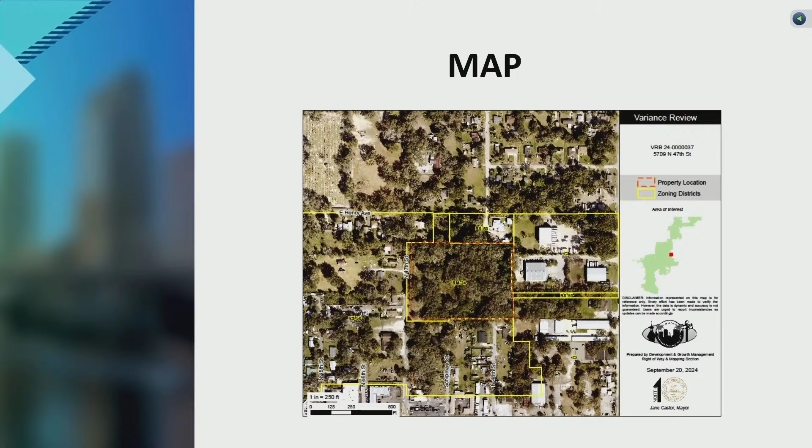So I broke this down into two presentations. We're going to do the grand tree presentation first, followed by the parking reduction presentation. This is a map of the site. These are the trees in question. I'll let you guys take a count real quick. There's 1, 2, 3, 4, 5, 6, 7, 8 total.

Eight, not nine. There's 8. One was lost in the storm. We'll cover that too later on in the presentation.

As you guys can see, these were storm prior photos, so this is not post-storm. This is a survey of the site. As you can see, the little red dots are trees.

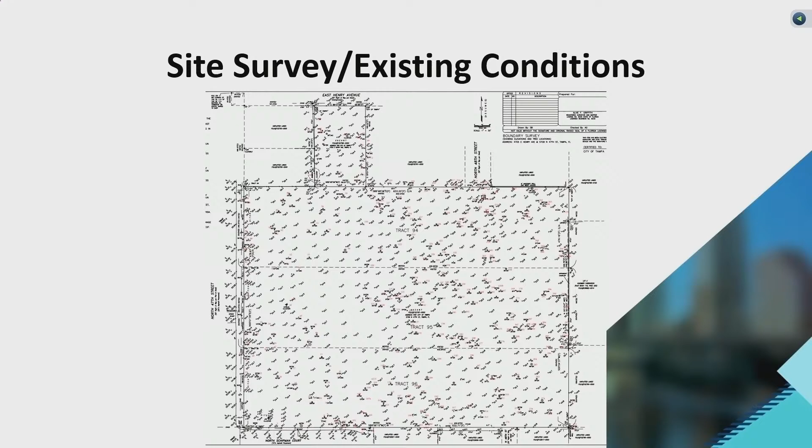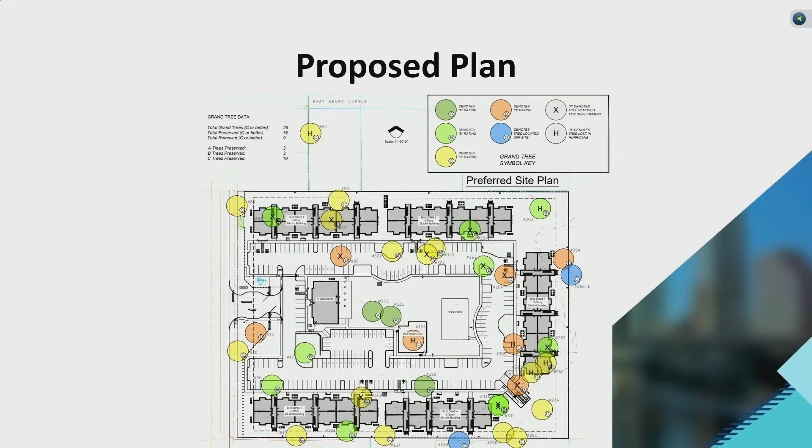Sorry about that. So this is the proposed plan. The proposed plan preserves 3 A trees, 3 B trees, and 10 C trees, all grands. So there's a lot of grand trees on this site.

This is alternative site plan 1, which converts the parking around the perimeter and places the large affordable housing building in the middle. This preserves 2 A trees, 4 B trees, and 8 C trees.

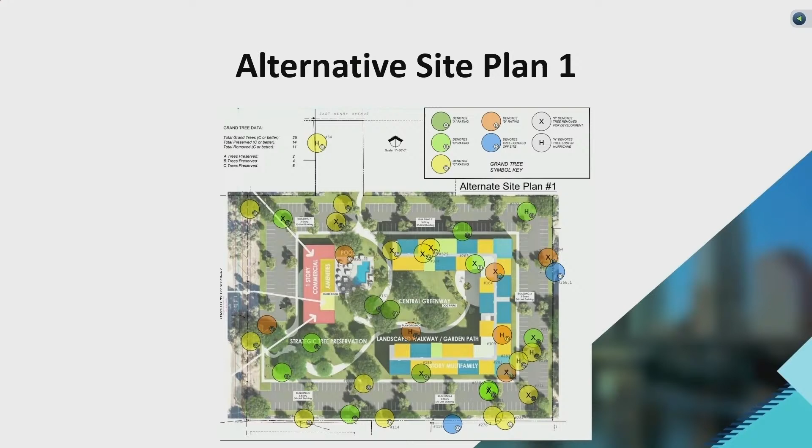And then this is alternative site plan 2, which was, I think, their first proposed project. This only preserves 1 A tree, 3 Bs, and 9 C trees.

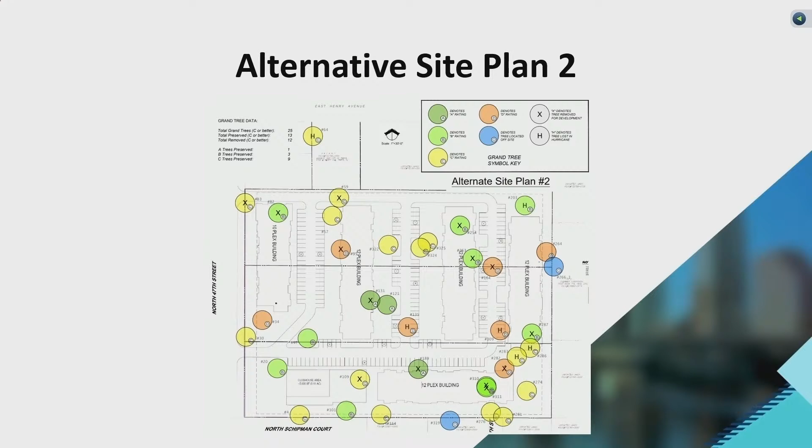So these are the development review comments. Natural resources found it consistent with conditions. The site is removing 16 grand trees total, 9 of which require a variance, which has now been bumped to 8 due to storm damage.

The developer is preserving 16 grand trees. At the time of construction, additional natural resources requests can be made. They are currently working with construction services on some of the parking and other elements to give these trees the best chance to be preserved.

And then transportation found it consistent, wastewater found it consistent, water found it consistent, right-of-way, stormwater, and TECO all found it consistent.

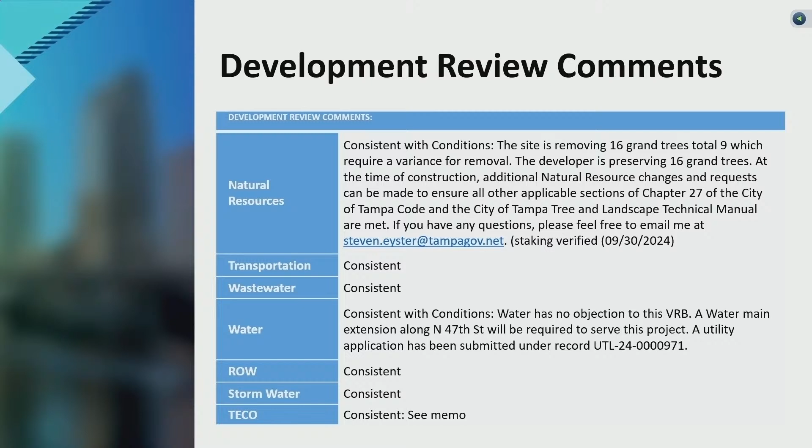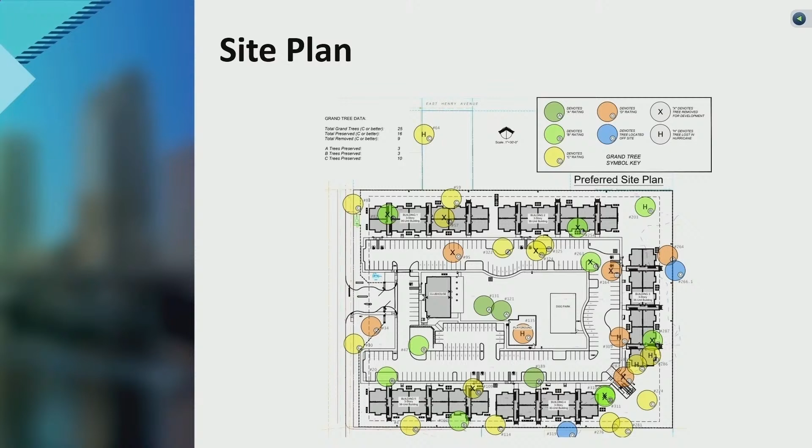This is tied to the preservation of the grand trees and the larger islands and the reconfiguration of the site. So they are reducing the parking down to what Live Local calls out for affordable housing, which is 0.8 per parking space per unit.

Again, natural resources found it consistent with conditions. Transportation added additional verbiage for this consistent finding. The applicant has provided an adequate justification letter for the requested parking reduction from 261 to 176. The proposed development includes 174 multifamily units designated as affordable housing at 80% AMI.

Additionally, the preservation of grand trees on site supports the parking alignment with the Tampa Comprehensive Plan. Wastewater found it consistent, water found it consistent with conditions, right-of-way consistent, stormwater consistent, and TECO also found it consistent.

I know the reduction on the request says 261 to 220. The transportation comment did not account for the guest parking spaces. So that's where that difference is, from 261 to 220. Just to clarify that.

And then here's the section for 2780. And then I'll be available for any comments or concerns.

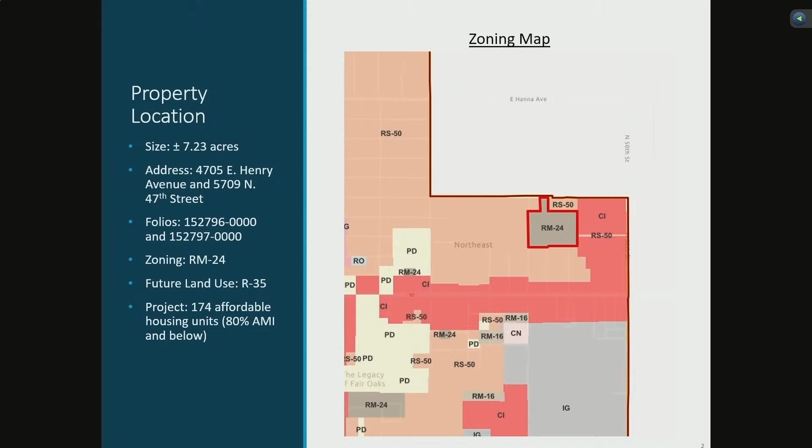We're here today with a variance request to reduce the number of grand trees. Staff indicated that it was 8. Our request was for 9.

I think there may be some confusion on one of the trees based on the type of tree it is. We are looking to reduce the number of trees and then also reduce the number of parking spaces. Again, as staff mentioned, we are reducing 85 spaces off of the spaces required for tenants. We are not seeking a reduction from the visitor parking that's required in code.

Looking at our site plan, this shows our preferred site plan that we would like to move forward with. The site has 25 grand trees rated C or better. This plan would allow us to preserve 16 of those trees, and 9 would be removed. There are 3 A-rated trees, 3 B trees, and 10 C trees that would be preserved with this plan.

This shows the trees that are seeking to be removed, in addition to the trees that were removed by the hurricanes. The applicant, after the hurricanes, did thoughtfully try to redesign the site based on the trees that were still available, so that we could preserve as many trees as possible.

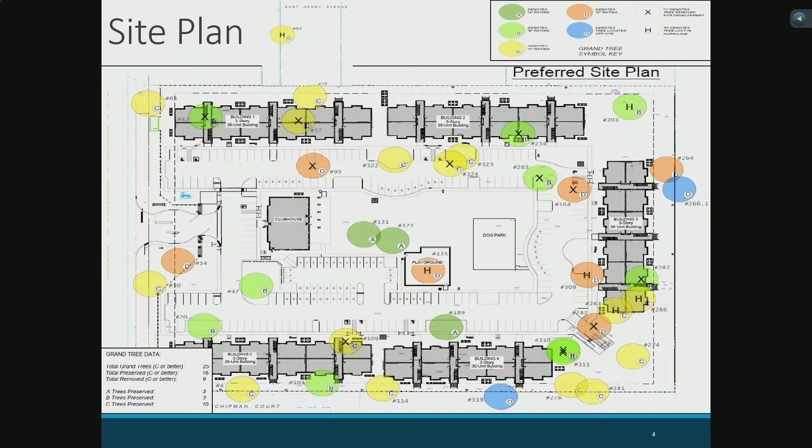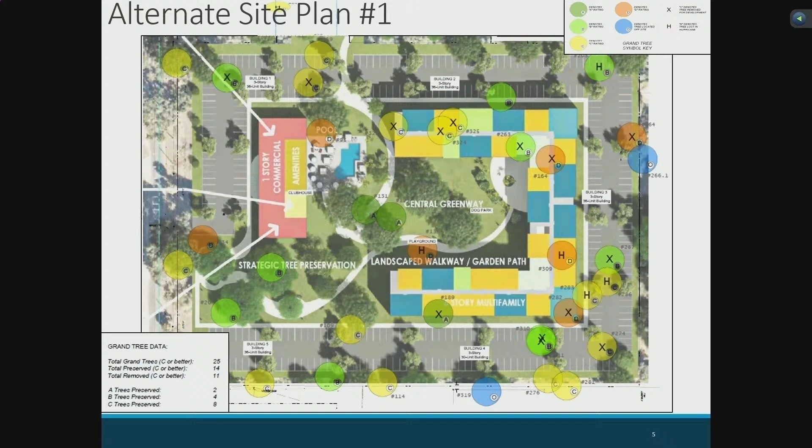This is an alternative plan that we looked at to try to address and save as many trees as possible. With this plan, we would have only been able to preserve 14 trees instead of the 16 we are preserving. In addition, the trees were not rated as well as our other plan.

Same with this one. With this plan, we again tried to redesign the site to meet the RM24 requirements. This plan would have only preserved 13 trees instead of the 16 we are proposing with our first plan.

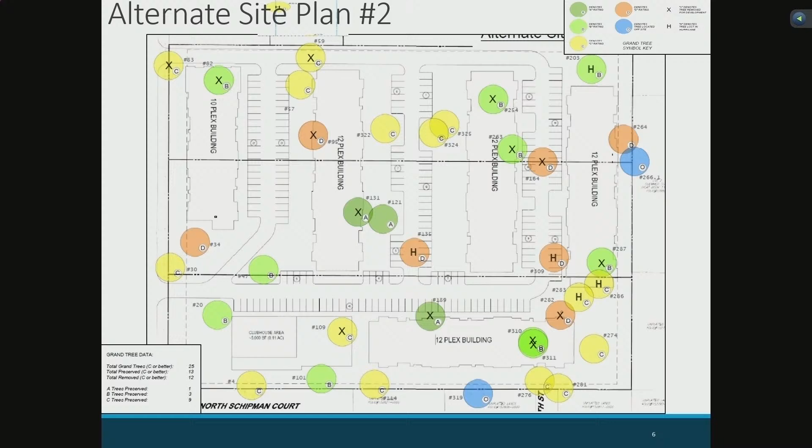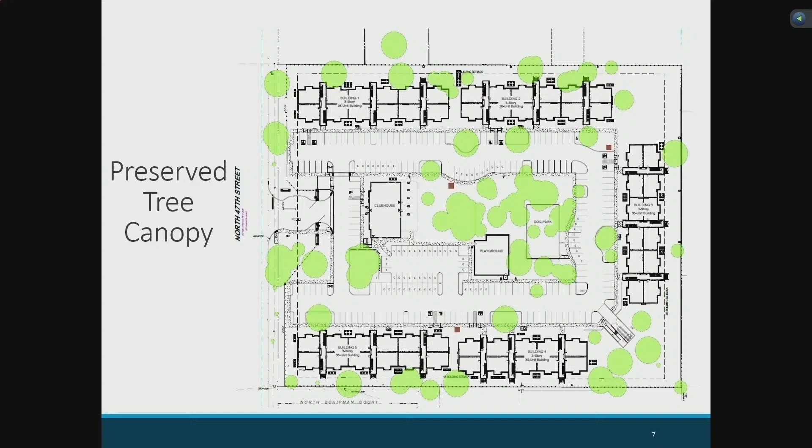As you can see from some of the photos of the site, there is a heavy tree canopy on this property. There are over 300 trees, though only about 180 are rated for the city's purposes. They have designed this site to preserve the tree canopy in the large open space area in the center of the site, over the playground and dog park, to still give it the feel that there are a lot of trees on this property and maintain that integrity.

Walking through the city's criteria for trees and the variance request, the practical difficulty on this site is truly just based on the number of trees. There's 341 total, 183 that are counted towards mitigation, and this created significant design constraints when trying to develop the property based on the underlying RM24 zoning district.

The applicant went through multiple iterations of site plans over a number of months to try and preserve as many grand trees as possible. This hardship is not due to the actions of the applicant. The site has never been developed, and because of the significant number of trees and the canopy, developing the site in any capacity based on the underlying zoning required removal of some of these trees.

This variance is not going to substantially interfere with the health, safety, or welfare of others. It's important after these hurricanes to remove the poorly rated trees, which can become very dangerous in the event of natural disasters. In addition, this variance is in harmony with the general intent of the code and comprehensive plan.

The project is allowed to be developed for multifamily based on the underlying zoning requirements. We've gone through multiple designs to preserve as many trees as possible, especially in light of the hurricanes. And lastly, the variance does allow substantial justice to be done.

This will allow for the development of affordable housing in the city of Tampa, and the applicant is retaining about 65% of the trees on the property, in addition to maintaining that large tree canopy in the center of the site.

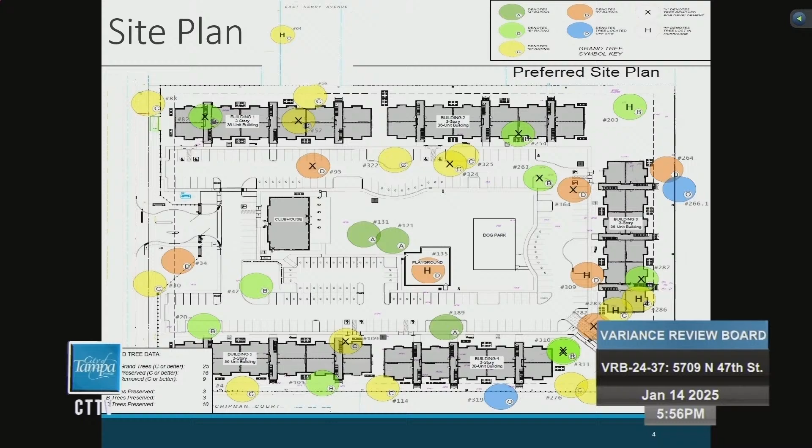Okay, nothing else, we can close the public hearing and hear from the board.

I think this is an excellent use of a piece of property, and the fact that you guys are taking this much effort to preserve what you have, I think is honorable. And I like the fact that the parking is within the middle as opposed to the perimeter. I think it gives the whole site a much better feel for the neighborhood than if you had parking around the outside. I'm not allowed to make a motion, but you guys certainly can.

Let's see, I've got tree down here somewhere. We'll be doing two separate motions. First one we'll do for the tree, the second one we'll do for the parking.

I move that the variance request for case VRB 24-37, for property located at 5709 North 47th Street, be granted as depicted on the site plan presented at the public hearing for removal of a grand tree, based upon the petitioner meeting the burden of proof with regard to the 6 factors determining tree removal as set forth in 27-284.2.5 T4 of the City Code for granting tree removal. Specifically, that the evidence provided in the record showed that they put together 2 additional site plans that did not save as many grand trees as they are able to save here, and we greatly appreciate that.

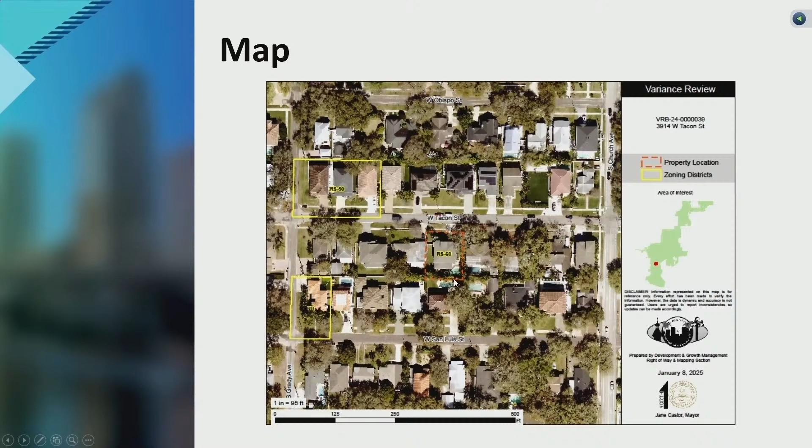All right, good evening everybody. The next case before you is VRB 2439. The property owner is Christopher R. and Jacqueline Ellett. The property address is 3914 West Tacon Street. The zoning district is residential, single-family 60. And the request is to reduce the screen enclosure setback requirement from 5 feet to 3 feet. The reference code section is 27290. This is a map right here, and as you can see, the property is outlined in the red dashed lines. This is a site plan right here, and this is the reference request.

The development review comments are as follows. Natural Resources finds it to be consistent with conditions. Transportation finds it to be consistent, as well as wastewater. Water has no comment as of December 31st, 2024. Right-of-way finds it consistent. Stormwater finds it consistent. And TICO finds it consistent with conditions. These are the standards for the Variance Review Board, and I'm available for any comments or questions from staff.

Okay, is the petitioner here?

Good evening. My name is Jacqueline Ellett. My address is 3914 West Tacon Street, Tampa, Florida, 33629, and I have been sworn in.

I had wanted to use the projector here because I did want to reference some photos during my presentation. Do I just set things on this?

So my husband and I bought this property in 2016, and the prior owners and the developer built this house along with the pool in 2013.

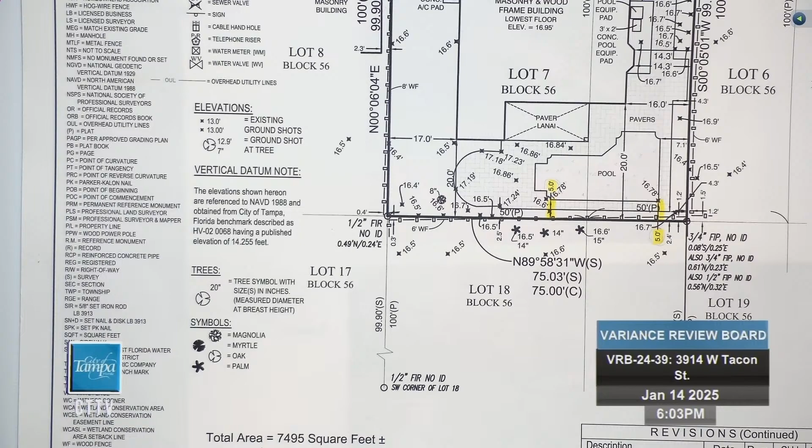Our hardship takes the form of this pool, because what we would like to do is install a screen enclosure around it. During our research we learned this is a copy of the survey we had done. You can see the exact water line of the pool is exactly 5 feet from this dark black line, which is the property line, and the screen enclosure setback requirement is 5 feet. So essentially our screen would be right inside of the pool if we wanted to have it installed.

Upon learning this, and before even beginning this project, I reached out to my neighbors who share that rear property line with me, Ben and Susan Stevens, and they've agreed that this isn't a big deal to them and that the variance requested will not substantially interfere with or injure the health, safety, or welfare of them or their property. So there's no problem there.

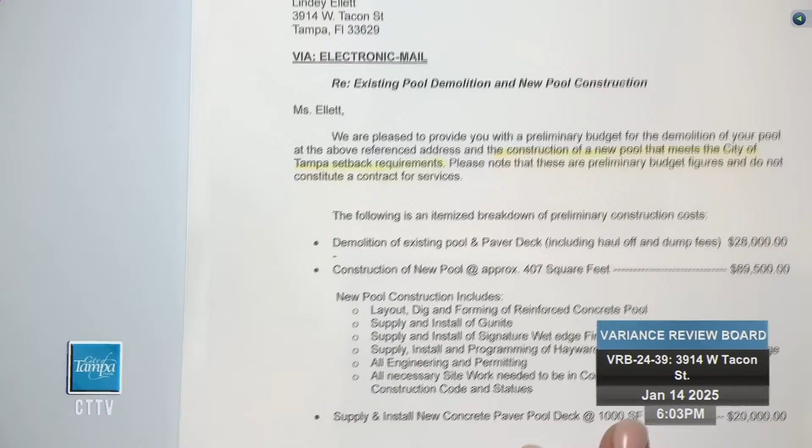From that point, I went on to worst case scenario, and I asked, well, what happens if this hearing doesn't go the way I would like it to go, and we have to actually move our pool? So this is the quote I received from Landscape Fusion, a local company, to demo the pool, move it in 12 inches so that we can go ahead and put the screen enclosure in. And it was $137,500, which is something we can't afford.

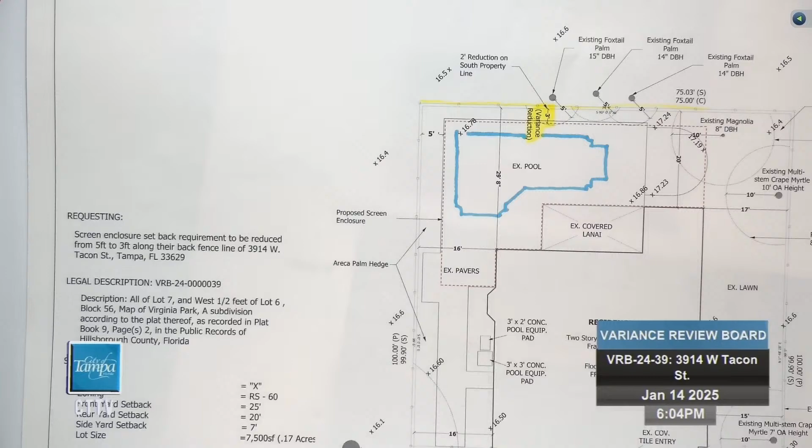So to add more clarity to our request, I've went ahead — this is the site plan for the proposed final structure. Can you zoom out a little bit? Zoom on out, Elmo? There we go. Yeah, so this is the backyard fence.

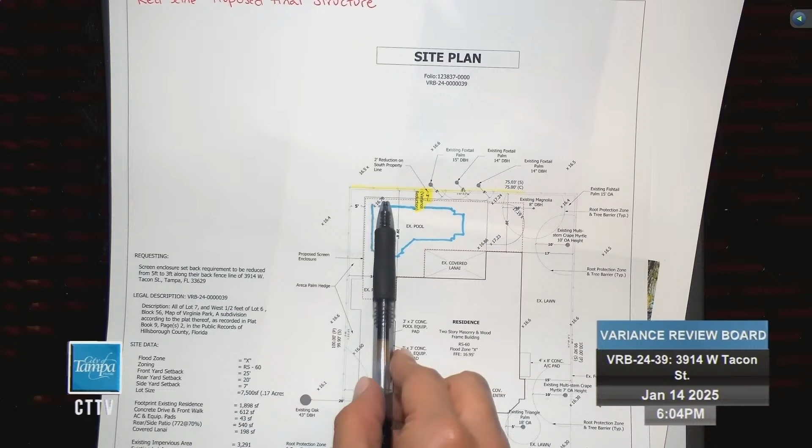This yellow line is the property line. This red dashed line is the proposed screen enclosure. And this blue line is the water line for the pool. As you can see, there is still room to enter behind the screen and to repair or maintain the fence and the screen enclosure as needed.

As far as — let me get my outline here. We do believe that there's a hardship in this case because of the existence of the pool prior to us owning it. Our neighbors don't care. It's an expensive problem to fix.

In addition, under the Tampa Comprehensive Plan, this request is in harmony with it, as there are personal property rights that have been recognized, and one of them is under PR Policy 1.1.1. It says that the following rights shall be considered in the local decision-making process, and that would be the right of a property owner to use, maintain, develop, and improve his or her property for personal use or for the use of any other person. So Florida law does require this board to at least consider the fact that we have a right to add a screen enclosure to our backyard.

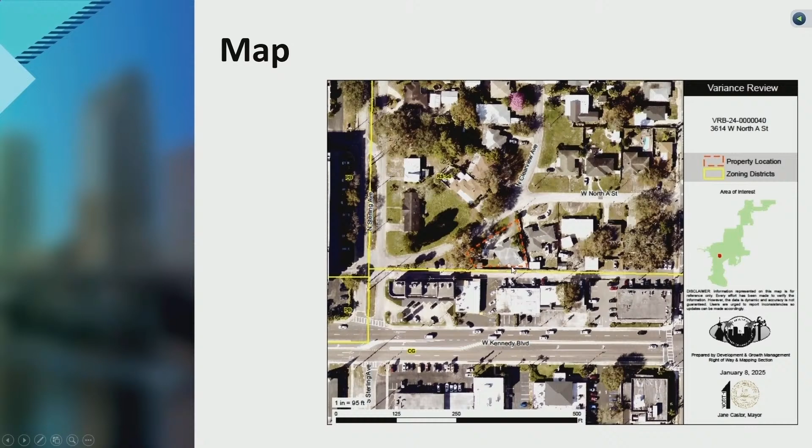That is correct. So any encroachments - this is an odd lot too. When we look here, they're getting a 20-foot setback here, because this is considered their front. So this shifts their rear and other setbacks around. That's why if you look here, everything is kind of adjusted. And that's what happened with this - the placement of the house plus the size of the lot has led to this situation.

Yeah, because the most severe encroachment is from the existing house. Correct, yes. It's 11.4 along the east side and 3.2 on the south side. Correct. Whereas the addition's is 14.6 and 11.6. Correct. Okay, thank you.

Any other questions? Okay, what was it? I'm sorry? Are we asking questions of the petitioner? Sure, still open. Sir, can you approach?

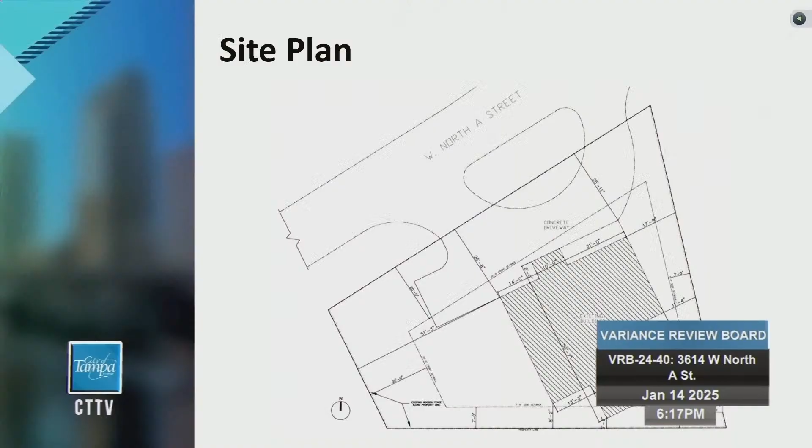So you mentioned that there was a sunroom existing already there? Yeah, I think what he already pointed out, the corner of the house is very close to the fence at the back. Like I said, I don't know where the front of the house is, but the corner at the south fence is very close.

That was an existing sunroom - it has AC and everything inside, so that was already there when we bought the house. That one was already there, yeah.

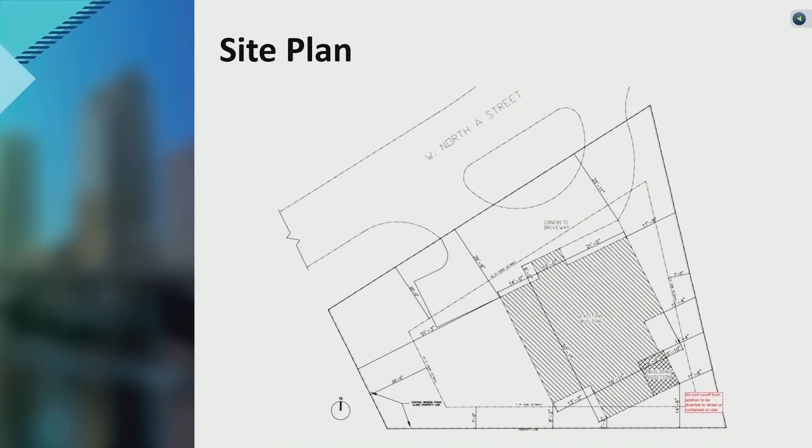Did you put a new roof on? Did you take the sunroom off and put a new roof, or did you just build underneath the sunroom? And for the bathroom? Or yes.

For the bathroom, yeah, the bathroom was a new addition. Where the sunroom used to be? No, the sunroom is still there. We didn't touch the sunroom. We just added the bathroom next to it. It's that one with the little lines there, on the right.

So the sunroom was already there with the AC even included. And so you did the addition, it turned out that you did not have permits to do the addition?

When we started, the people who did the renovation before us, before we bought the house, told us we could do it, or they could help us, because they already had a permit for the area for flipping or remodeling the house. So when the city went, they didn't really have anything. But the city asked for a variance and a permit, and we solicited that, and they approved it. I mean, when we did the whole process.

What we didn't do is finalize everything. We didn't know how that worked, so we didn't finalize the process. But we already had the variance approved, and the permit, for that bathroom.

So it sounds like we had a renovation permit, and the bathroom is complete. Yes, sir. And you're saying you had a variance to put the bathroom in? The variance, I mean, we asked for the variance after we started with the bathroom. You asked for it after, so this is clearly an after-the-fact request, right?

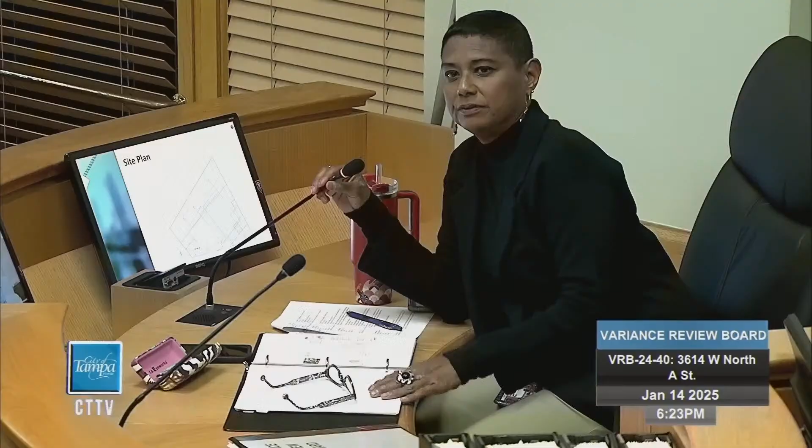There had been a variance and a permit previously. So variances do have a duration, right? So if the permit wasn't closed out and the variance is now expired, permitting can't finalize and close out the permit. It has to start all over again. Correct, so they have to pull a new permit in order to close this addition out, since it wasn't included in the other permit, correct?

We did, so after we were granted the variance, we pulled the permit, did finish the bathroom with a permit. We asked for a permit, received a permit, somebody did the work, but it was never closed. That's what happened, the permit never got closed out. And so when we took it up again, I thought it would be as simple as closing it out at that point, and it wasn't. They're like, oh, the variance only lasts for 2 years, and so that's why we're back here at square one.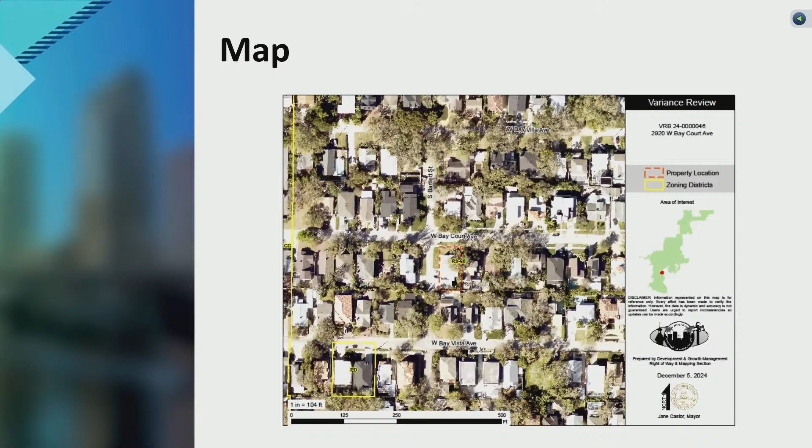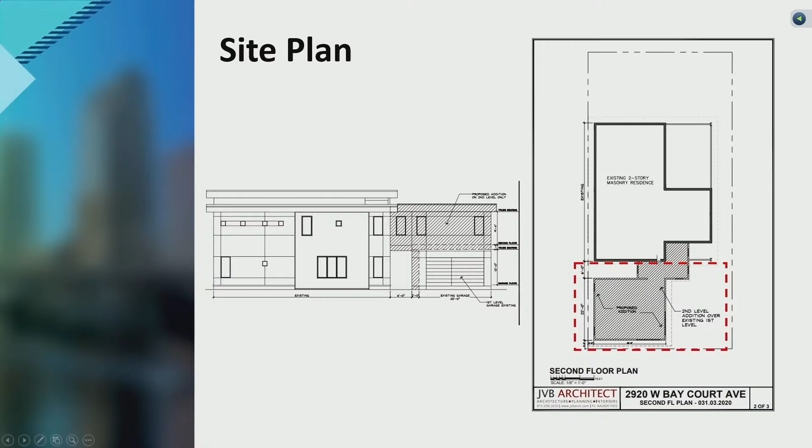That letter has been added in your packet as well. This is a map of the site, and this is the current layout of the house. I included both the site plan and the side profile. The garage is located here and is connected to the main structure, and they'll be adding a second floor to tie it together.

This is a close-up of that section showing the 2 foot setback. These are the comments from the reviewers. Natural Resources found it consistent with conditions, stating that both buildings already exist and the variance would be to add the second floor. Transportation found it consistent with conditions, noting the driveway will have to meet transportation technical standards. Wastewater, water, right-of-way, stormwater, and TECO all found it either consistent or had no comment. This is the standard for the Variance Review Board, section 2780, and I'll be available for any comments or questions.

Good evening, Board. Steve Michelini. I've been sworn, and I'm here representing Dr. Patel, living at 2920 West Bay Court. Mine is 2407 Sunset Drive, Tampa, Florida 33629. Let me walk you through the...

Yes, I was sworn. The site plan first. The site, first of all, is only 50 feet wide and it's zoned RS 60, so we're already starting off at a disadvantage. It's also on a corner, which applies additional setback criteria. Our request does not affect that.

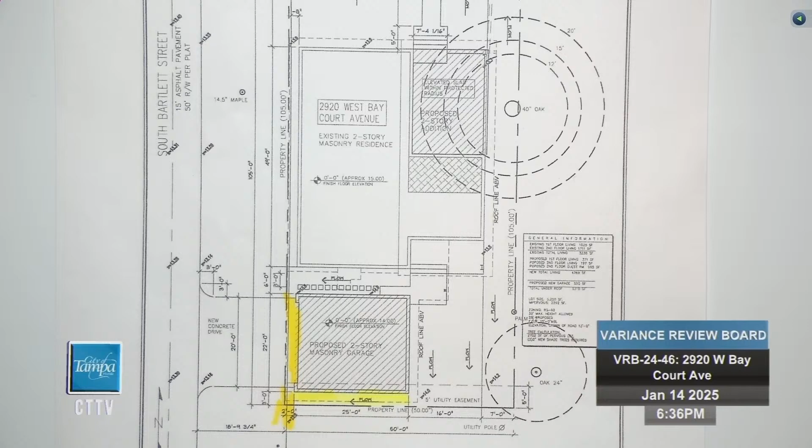We've been working with the tree and landscaping department to make sure there were no conflicts. It also restricts us on the ability to provide any additional square footage for the home because of that, and because of this off-site 24-inch oak, which has an extremely large limb span that goes over into this property.

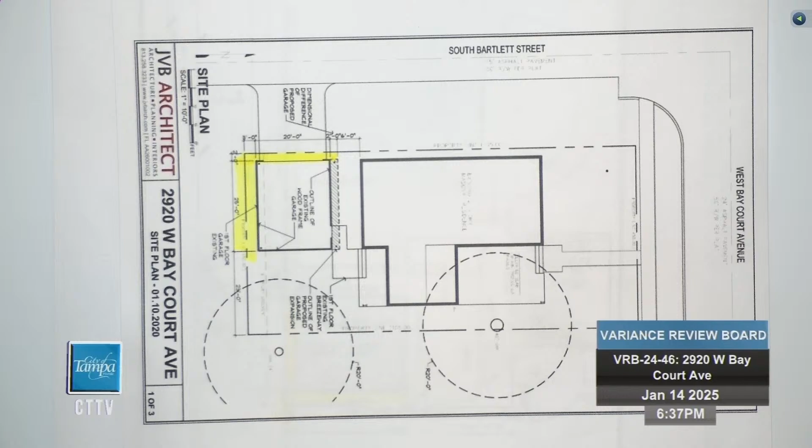This is a little closer detail showing the extent of the impact of those trees on the main structure and also on the existing garage. And there's a close-up showing you basically the 3 feet here of the setback and the 2 feet over here that already exist on the garage apartment.

This is a picture of the existing house. And this is the existing garage.

Dr. Patel has provided a letter which I believe you have a copy of. I'll read it into the record. My name is Bhavin Patel, and I live at 2920 West Bay Court. On November 19th, 2020, our request for variance was approved to add a 2-story detached garage.

The variance was valid for 2 years, and during this time, most of the country was on lockdown from COVID. As a medical doctor at the time, my children were age 2 and 4, both high risk to COVID infections. Because I was deemed an essential worker during COVID, I was exposed to patients at high risk for COVID. As a result, I was living away from my family home during the weeks, and I had to work. I had to put a hold on construction until the pandemic was over, and I did not want my 2 children at high risk to be exposed.

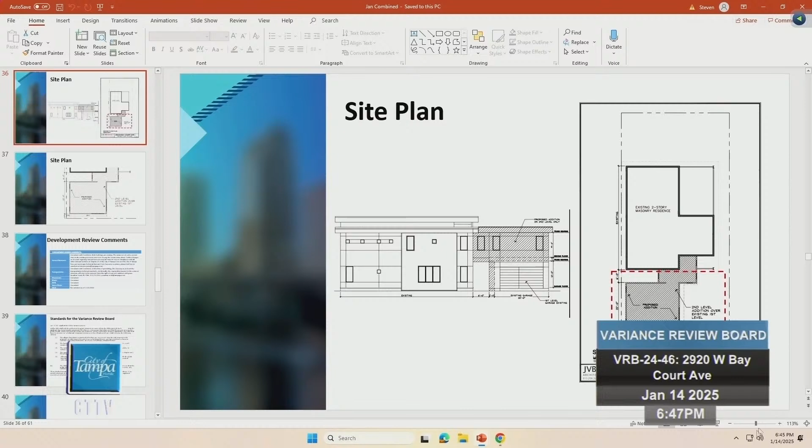Side is 3 and 2. There's the site plan. Okay, so the side does go to 2. Okay, then I guess we could do just this one, and then you'd have to come back for the south side.

Should we perhaps continue this case and ask that they renotice for the additional setbacks? That's up to staff. Is that part of your request, Stephen, in the application, or does the request need to be modified? To address legal's question, it would be both, the request would need to be added, and then noticing would need to be redone. So it'd be both parts.

Okay, would the applicant like to proceed with having this variance for just the west side now and then come back for the south side, or would you like us to continue and come back for both, and modify the request? Staff would recommend doing a continuance, so then we can include both things under one properly noticed variance request. Okay.

Thank you, sorry for the trouble. I will withdraw my motion, and I guess I need to reopen the public hearing. We respectfully request a continuance so we can amend our application. I move to open the public hearing so that we can hear the request from the applicant. Second.

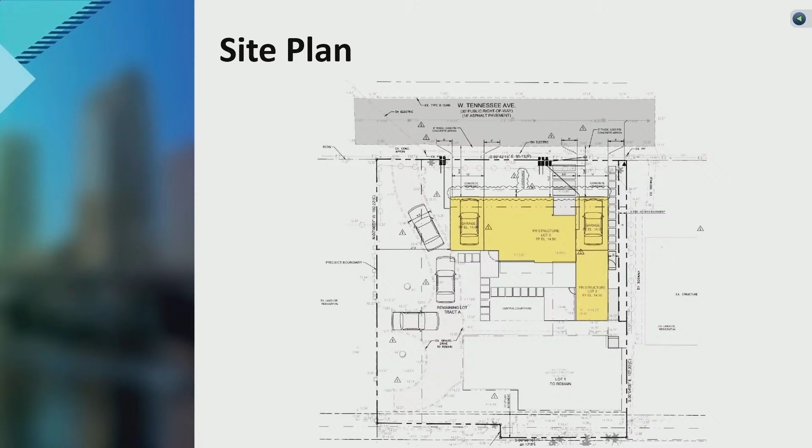Hopefully I tried to clarify. It's kind of a weird nuance in the code. But if you guys have any follow-up questions, I'm available.

Okay, thank you. Natural resources found it consistent with conditions. The setback variance is not within the tree protection zones. Transportation found it consistent, wastewater found it consistent. Right-of-way found it inconsistent because this project is tied to a final plat, which would need to be updated with them to address any HOA property or easement if the variance is granted. Stormwater found it consistent, and TECO had no comment.

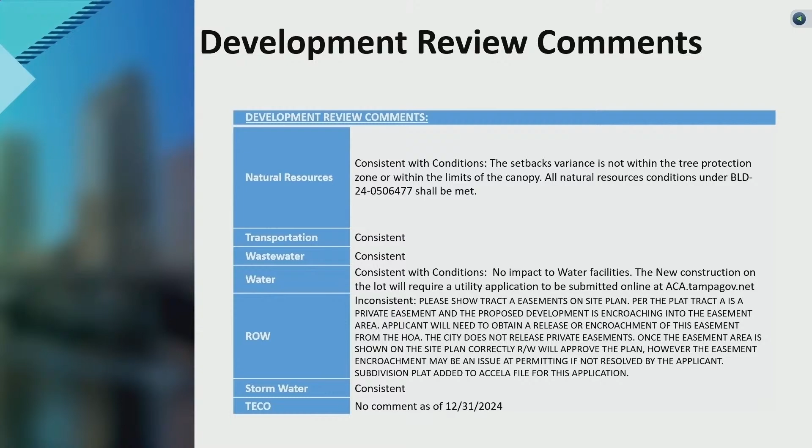Let's see if I have any additional information. And that is it. Let's switch over so we can kind of zoom in, just to clarify this request a little bit more.

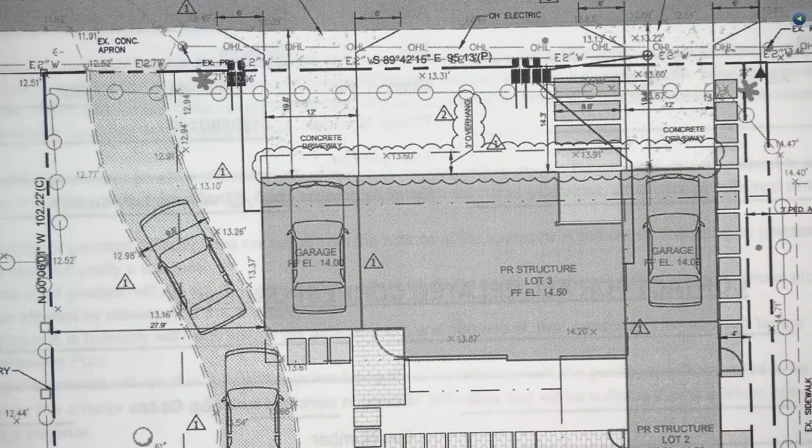So the current property line is right here. This is the setback that was granted to the previous variance. This hash line here is the 3-foot overhang for the architectural feature that reduces the front setback now to the requested setback that's in front of you today. And then this is non-livable space, this area here. It can only be used for architectural features.

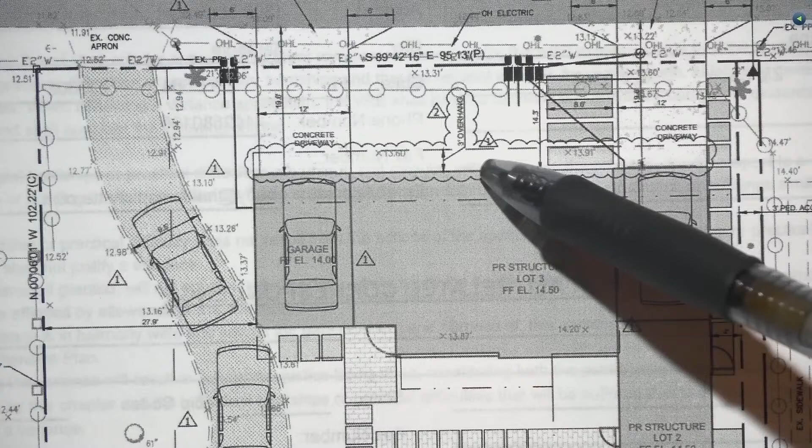Would that be like an eave? Yeah, like an eave. This has almost a large vertical wood display feature with a glass front. I believe the applicant has renderings of that as well to show.

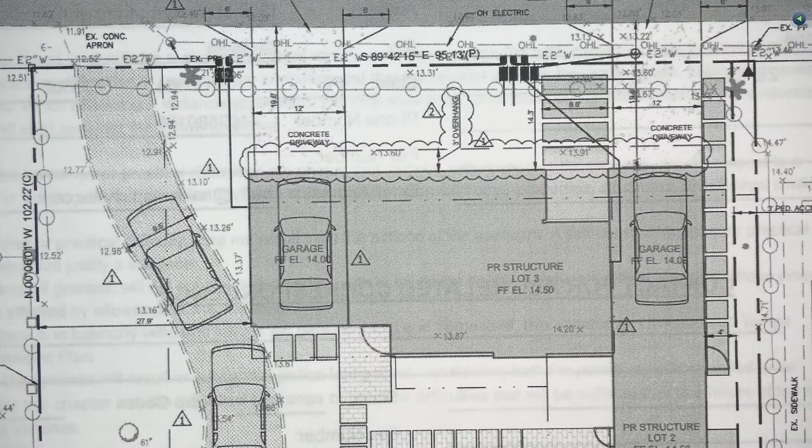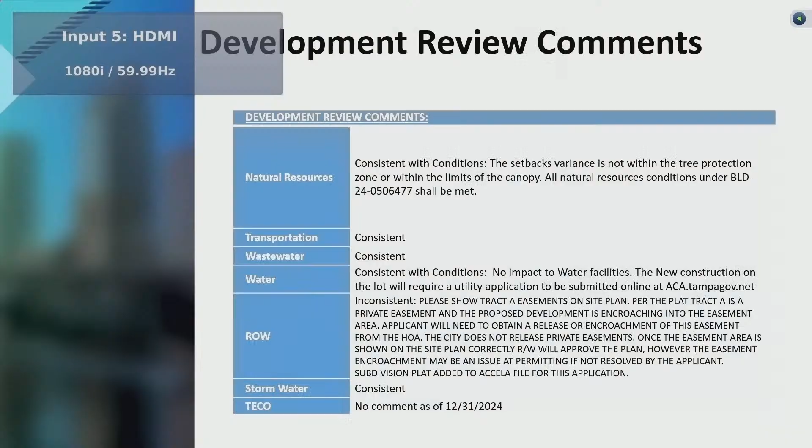Okay, is the applicant ready? Good evening, my name is Hazem Habib. Address is 8341 Torrington Avenue. I'll be representing the owners, Andrei Girenkov and Inara Alimova, and I've been sworn in. I do have a flash drive I would like to use.

Should be the one that says final. Yeah, yeah, this one.

The project location is 2510 West Tennessee Avenue, and the owners are Girenkov and Alimova.

Do you have the agent authorization form to present? I do not have that, no. The applicant, Buffy, could not make it; she had a medical emergency with her husband, so I'll be representing her as well. Do you work for the company? Correct, yes. I was involved in the design for this project.

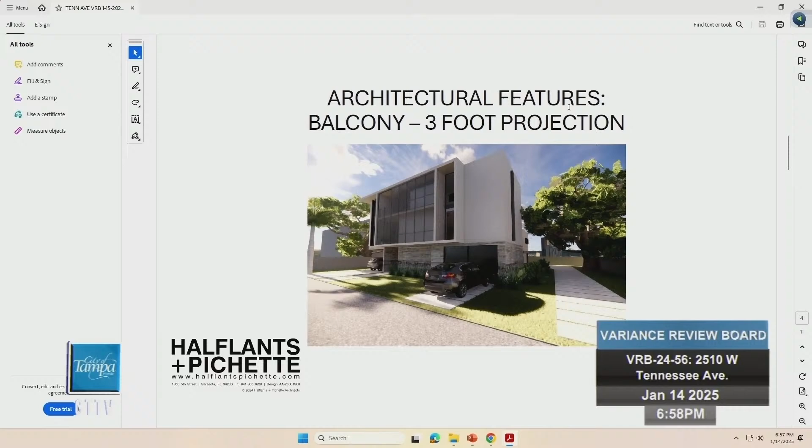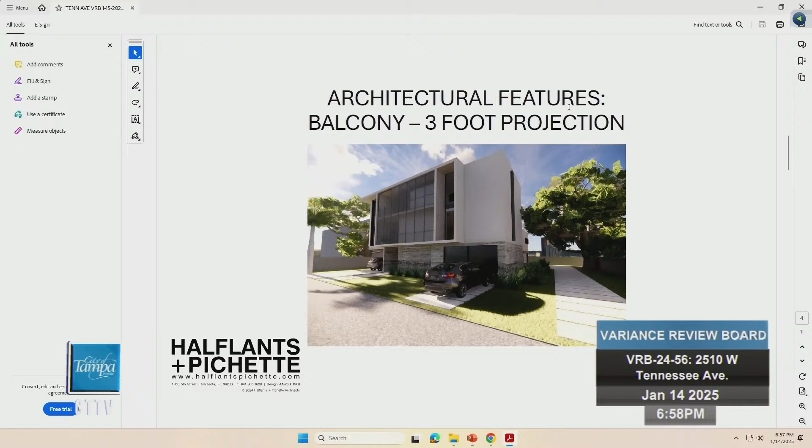So this rendering shows this 3-foot projection. It only consists of the balconies on level 2 and level 3, and it's non-habitable and not walkable. It's only a major design feature of the character of the house.

This large shadow box design enhances the aesthetic appeal, making the home unique and cohesive in its style. It adds depth and interest to the facade, moving away from a flat, uninspired look that might detract from the neighborhood's visual quality.

This 3-foot projection does not negatively impact the neighbor's sightlines or privacy, since it's only accessible from these balconies facing the street, facing Tennessee Avenue. The overhang is entirely within our property line and does not interfere with public rights of way or utilities.

Approving that variance allows for high quality architecture in the area, increases the aesthetic standard, and potentially raises property values for the neighborhood if the design aligns. As I mentioned before, this really depends on this overhang and its projection. If you have any more questions, please let me know.

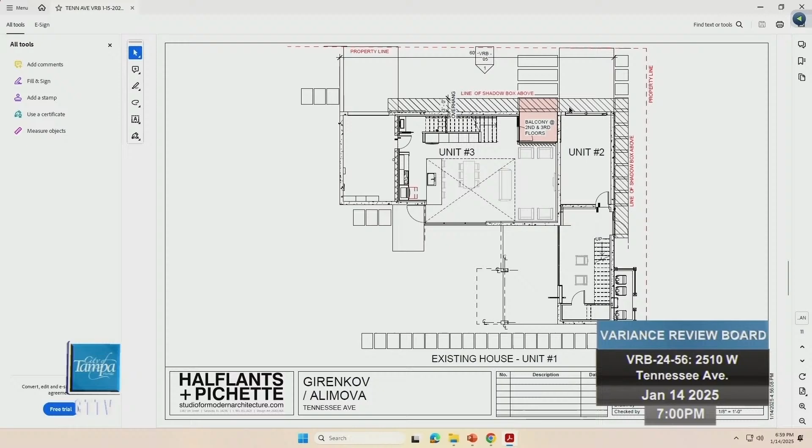We're not encroaching on the setback on the first level. It's just on the second and third level, and it's a major architectural feature that represents the uniqueness of our house and the overall design and aesthetic of it.

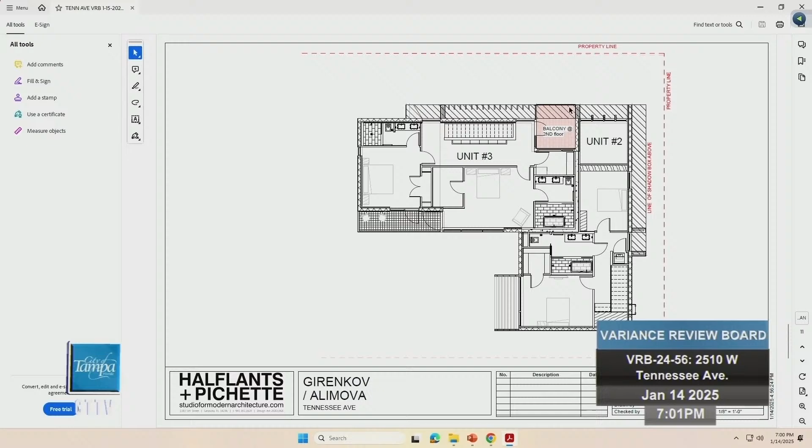You can also see here the balcony on the second floor highlighted in red. You can see that the rest of this projection is not habitable, and it doesn't encroach on anyone's privacy. This is also the second floor and the third floor as well.

This elevation from Tennessee Avenue is the front main elevation, and you can also see where this projection is mainly used, and the rest of this feature is such an integral part of the overall design. This concludes my presentation.

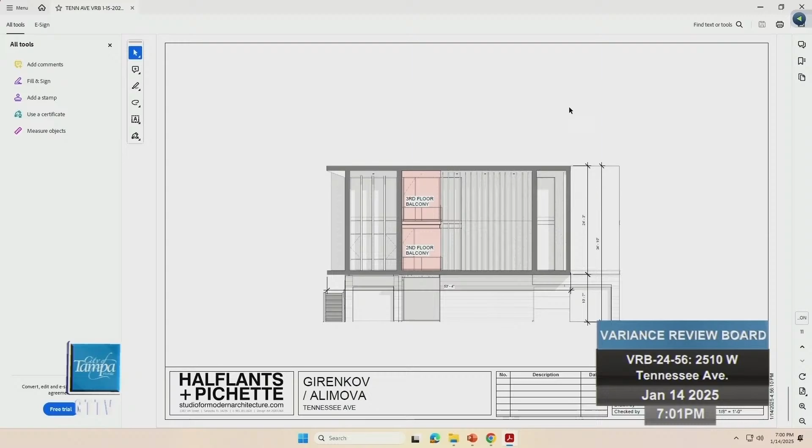Is there anyone here to speak for or against? Rebuttal? Do we have questions from the board? Yeah, I've got some questions.

Looking at the site plans, it looks like the architectural feature runs parallel with Tennessee Avenue, but also encompasses the east side of the building along the side lot line. The request is to reduce the setback from 14.3 to 11.3. Are you only needing the reduction in setback on the front of the building, or also a reduction in setback on the side of the building?

So it's only the front, but we don't want to reduce the setback. We just want to have that 3-foot overhang that is naturally allowed in the code applied to this.

So we don't want an overall setback to 11.4. We just want to keep the setback as is, but have that 3-foot overhang that is usually allowed. Okay, and for staff, for the wording of that, are we still going to call it a reduction in setback, or are we going to call it an allowance of the 3-foot architectural feature? It would still be a reduction in setback, but you could clarify as a conditional approval that the additional 3 feet can only be used for architectural features.

Is this a request to reduce just the front or the side as well? Just the front. So the side portion is already fine, it meets code. Yeah, the side is fine. So the side architectural feature is fine, the front is what needs the reduction. Correct. And there was no prior reduction to the side? That is correct. And there's nothing on the ground floor, it's just an overhang over that space. Correct, just the second and third floor, yes.

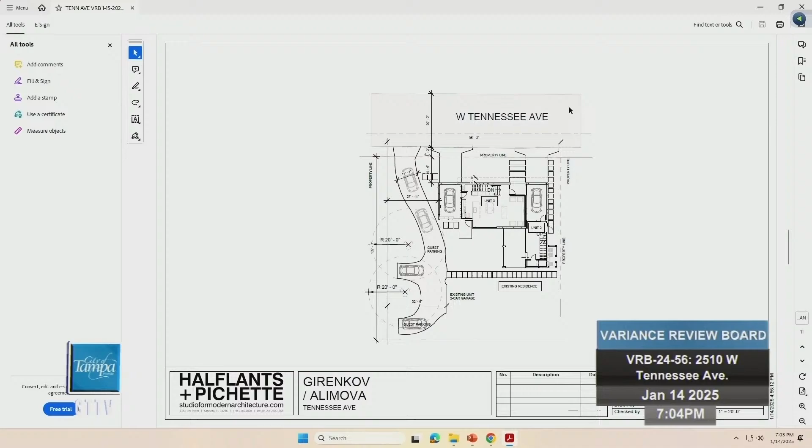How is that noticed? Is that a problem? No, the request was to go to 11 foot 5 inches, so that's what it would have to be. And how was it noticed? As 11 foot 5 inches on the notice documents. Yeah, okay, which gives them 1 inch of leeway. Correct. All right, we'll take it. Thank you for the clarification.

Just for my own clarification, so we don't need to worry about the right-of-way inconsistency, right? With the HOA, the HOA has to approve this? We can approve the variance, but then the HOA has to give final approval for them to do it. You'll have to update the plat to reflect that. Correct. The owner, which is actually still the HOA manager on this application, would have to go through and update the final plat to reflect what has been changed, because currently that 3 feet is considered HOA property. Correct. And then when they do that, if this is granted, that would have to be updated. Gotcha.

Okay, anything else? Any other questions? Rebuttal? Okay, seeing none, we'll close the public hearing and hear from the board. I'll give it a swing, but if legal hears something in any portion of this they would like changed, just throw a hand up and we'll get it corrected for you.

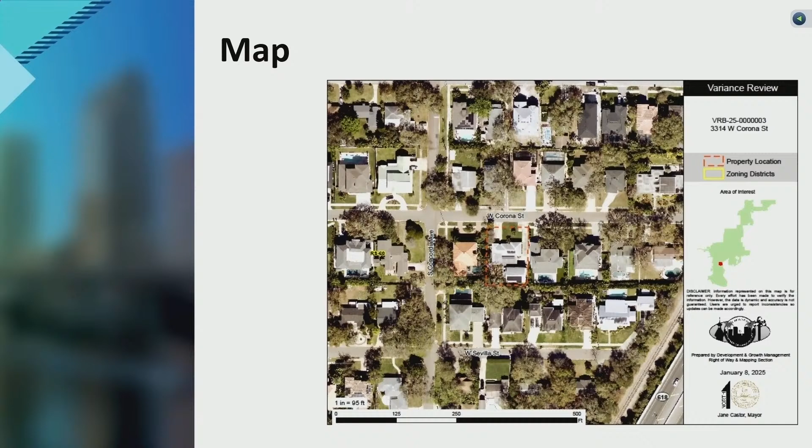This is a highlight of the property. This is the existing conditions of the property. The reason for the request is this connective portion right here. Now that this structure is connected to the detached structure, it has to meet principal structure setbacks.

The garage currently sits 10 feet off the rear property line and 3 feet off the east side.

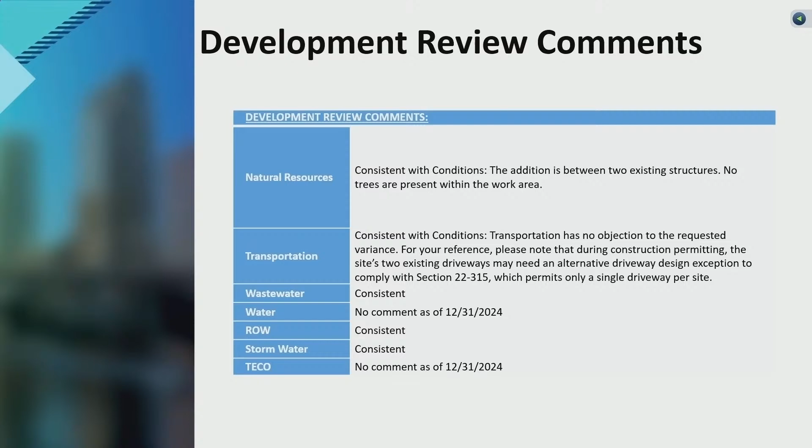Natural resources found it consistent with conditions. This is an addition between two existing structures, and no trees are present within the work area. Transportation found it consistent with conditions. Wastewater, water, right-of-way, and stormwater all reviewed it. TECO did have some last-minute conditions. Due to utility lines in the rear, if anything ever happens to the structure, it will not be able to be constructed back due to the power line clearances.

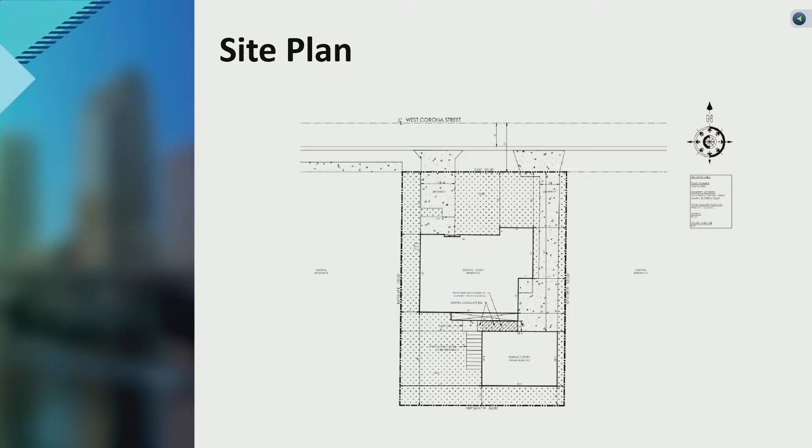Thank you, sir. The applicant come forward, please.

My name is Jeff Bogner. I reside at 3314 West Corona Street, Tampa, and I was sworn in.

So just an introduction to the request. We are requesting that the east side and rear setbacks be changed for the primary structure of our existing detached garage. This will, as Stephen said, make the detached structure part of our primary residence, which is why we're here today for the request.

The variance we're requesting is the minimal distance possible since the structure is already existing. We're not building that. This is a unique hardship to our situation. When we purchased the house, the detached two-story structure was already there. It was built 40 years ago or longer, I'm not sure when, but sometime in the 70s. And in order for us to attach it, we do need the variance.

If the variance would not be approved, then it poses a significant hardship to us, as we'd have to tear this structure down in order to move it over 6 feet and pull it forward 10 feet. This would add very high unnecessary waste to the environment and pose a large financial hardship to our family that would be difficult to do.

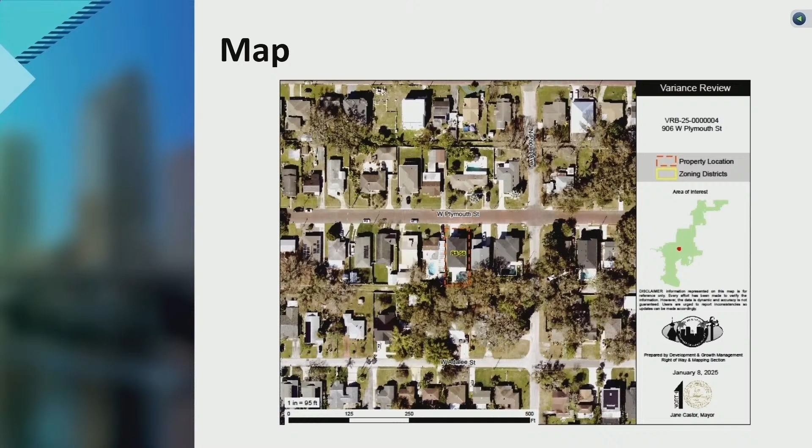The development review comments are as follows. Natural Resources finds it to be consistent with conditions, stating the screen enclosure is planned to be installed over the existing pool deck area. During the permitting process, a pruning assessment may be required to evaluate and address any potential canopy conflicts. This assessment should follow ANSI A300 Part 1 pruning standards to ensure that any necessary pruning is performed correctly, maintaining the health and structure of the tree canopy.

Transportation finds it to be consistent. Wastewater finds it to be consistent. Water has no comment as of January 2nd, 2025.

Right-of-way finds it to be consistent, and stormwater finds it to be consistent with conditions, stating the property seems to have more than 50% impervious area. If that is the case, it requires compliance with the stormwater technical manual for the construction of a retention pond. Please calculate the percentage of ground covered area to determine if a pond is required. If required, please submit plans for review. And TECO has no comment as of January 2nd, 2025.

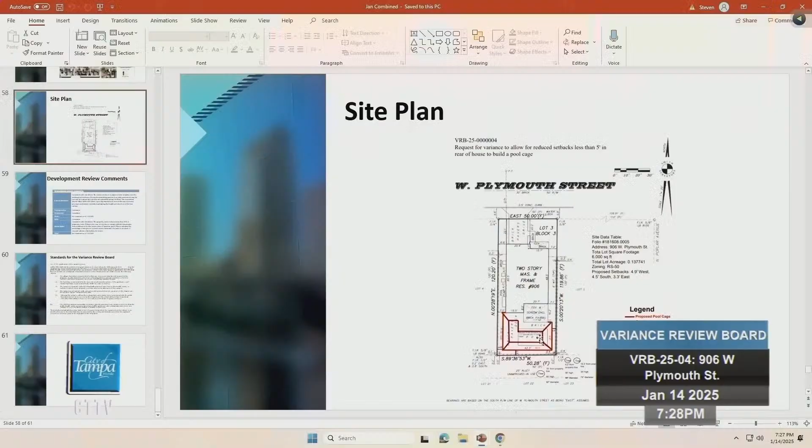In our packet, we have a boundary survey that outlines the trees that border this property, but it's not color-coded. Can we see that slide so we can make notations on it? Do we have any pictures of what the tree canopy looks like in the area? Most of the trees on this site are palms around the perimeter. I just wanted to put that note on the record to make sure the palms were maintained correctly.

There's off-site trees here, across from this 20-foot unimproved alley. And then there are a few oaks here, here, and here. They're all outside of the project, outside of the protective radius, so they're going to have to meet the pruning standards no matter what. I'd just like to have that on the record at this time.

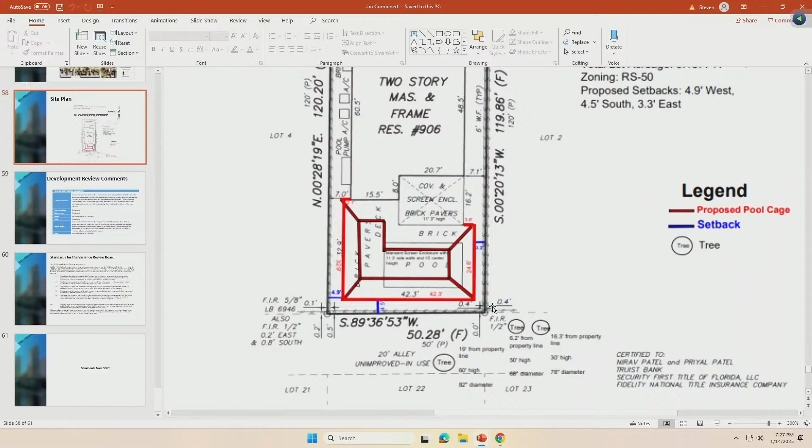I just wanted to make sure that we didn't have an extensive live oak canopy interfering in the space. If we zoom in here, you can see the pool. There's small foliage and limbs around the perimeter, but I want those to be correctly pruned when the pool does go in, so we don't have stub cuts along the property lines. Okay, thank you for clarifying that.

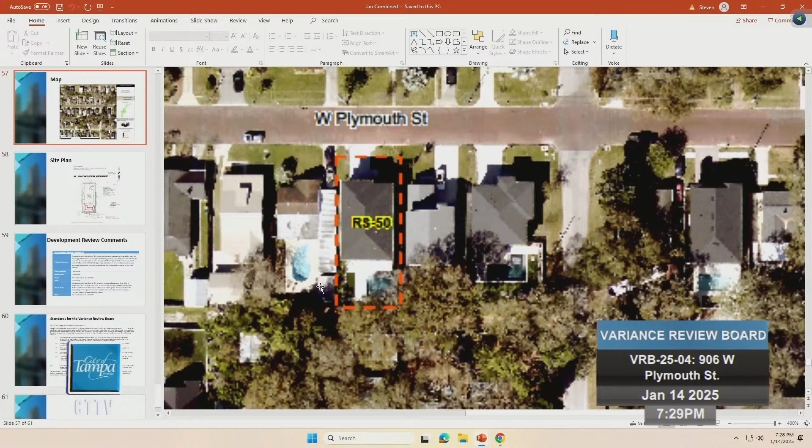Any other questions? Okay, close the public hearing and hear from the board. Did you have any rebuttal you'd like to make after hearing about the trees? No? Okay, motion?

I move that the variance request for case VRB 25-04 for property located at 906 West Plymouth Street be granted as depicted on the site plan presented at the public hearing, for a reduction in setbacks on the east side from 5 feet to 3.3 feet, on the west side from 5 feet to 4.9 feet, and on the south side from 5 feet to 4.5 feet, for the installation of a pool screen.

Based upon the applicant presenting competent and substantial evidence in the record and at this public hearing of an unnecessary hardship or practical difficulty, considering the 5 hardship criteria set forth in section 27-80 of the city code, specifically that it is a minimal reduction for a pool screen that will allow enough space around the pool to safely navigate around it, and there is neighborhood support, and no health or safety issues with this proposed site plan.